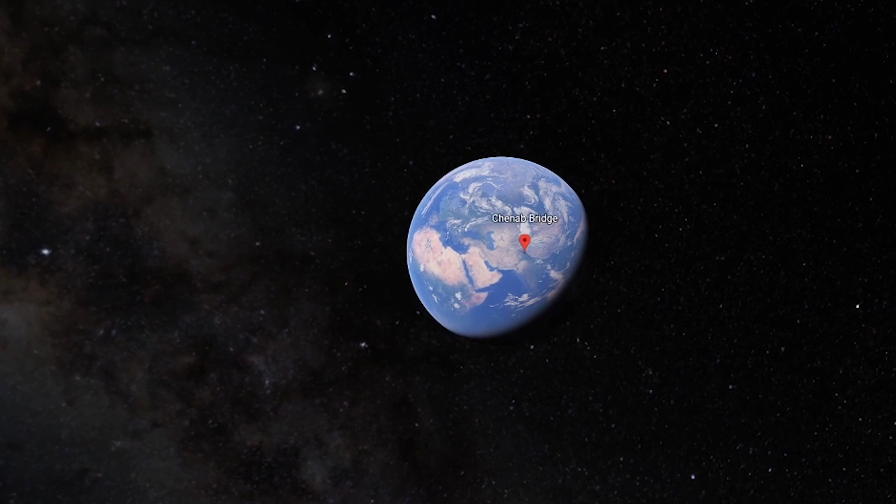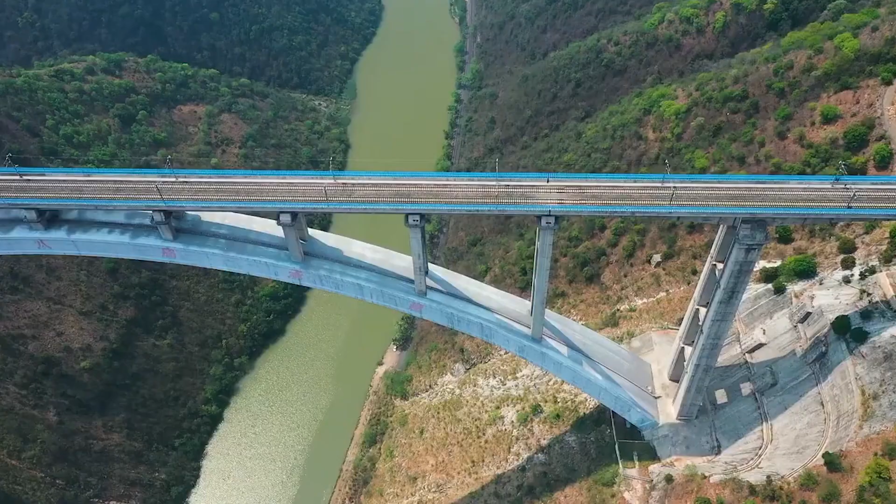Chenab Bridge is located in Jammu and Kashmir region in India. It is a part of the Jammu-Udhampur-Srinagar-Baramulla Rail Link USBRL project. Chenab Bridge has the unique distinction of being the highest railway bridge in the world, spanning at a height of 359 meters above the river. It has been built in some of the toughest conditions and is really a marvel of engineering.

The USBRL project is owned by and being built under the guidance of Northern Railway, Indian Railways. Northern Railway is one of the oldest and biggest railway zones in Indian Railways. The Northern Railway holds its headquarters at New Delhi.

Northern Railway, apart from the USBRL project, has a lot of achievements to its name, like the Jammu-Katra Rail Link project. Northern Railway is also currently under the process of constructing some of the toughest projects in the Himalayan region, including the Rishikesh-Karnaprayag project and the Bilaspur-Manali-Leh project.

The trustworthy team of Konkan Railway Corporation Limited is in charge of execution of the USBRL project. They have ample experience of working in tough terrains, like the Konkan Railway Network commissioned by them, which was an extremely tough project due to the mountainous terrain and more than 2,000 bridges and 90 tunnels. It was the biggest railway project of the century.

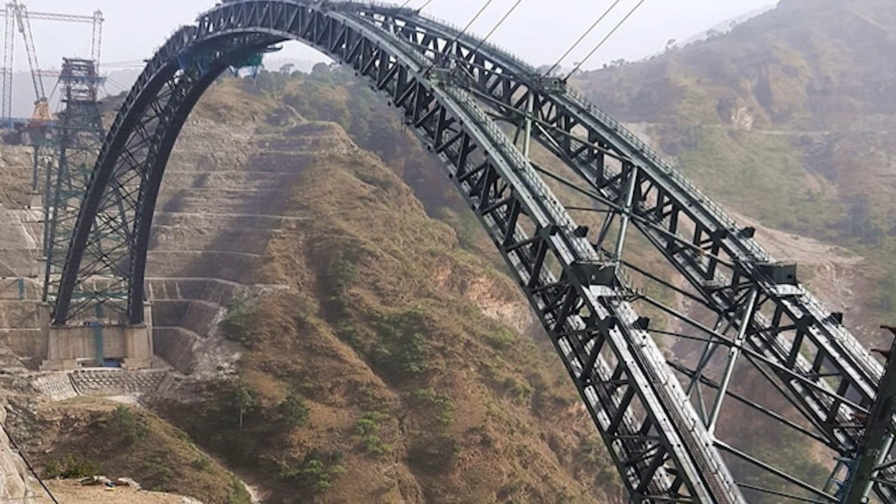The project of construction of Chenab Bridge has been awarded to the Chenab Bridge project undertaking, in which AFCONS is the executing partner. The Chenab Bridge is being constructed by AFCONS Infrastructures Limited. AFCONS is a transnational company with projects in over 25 countries.

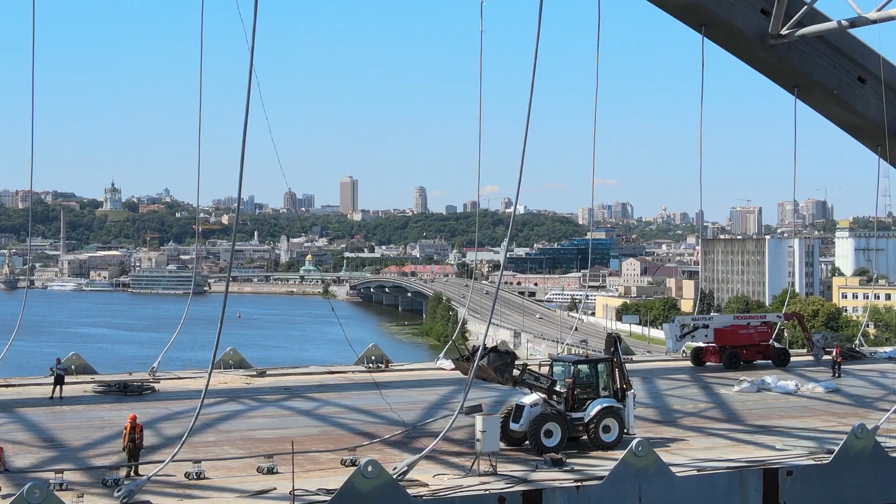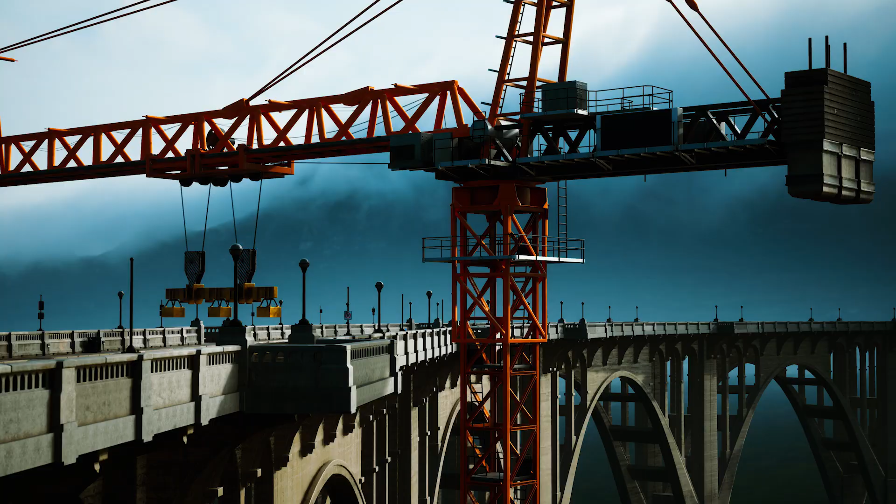It is the only Indian company ranked in the top 25 international contractors in both marine and port facilities and bridge sector. AFCONS is also the highest ranking Indian contractor in top 50 international contractors in transportation sector. AFCONS have a huge experience in extreme engineering and construction, and it shows in the construction of the Chenab Bridge.

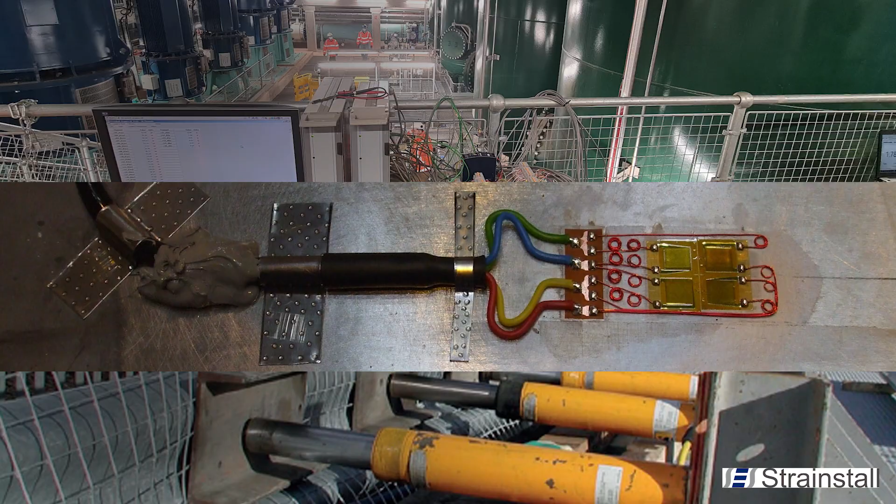The bridge health monitoring part for Chenab Bridge is being handled by Tranz Rail Solutions along with their partner Strainstall, which is a part of the James Fisher Group. Strainstall is the leading structural health monitoring company in the world, with the health monitoring of many signature bridges in the world in their portfolio.

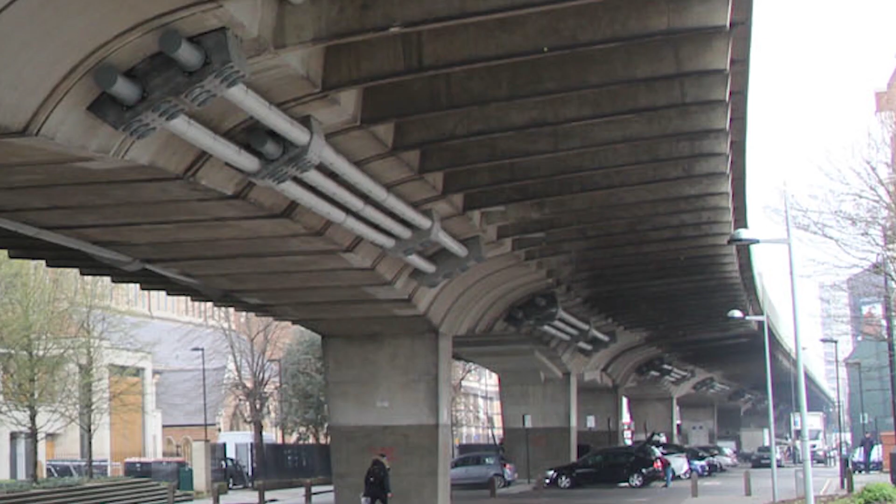The complete solution provided by Strainstall is unparalleled, a combination of hardware and software which makes monitoring of the structure extremely easy, thus resulting in quick decisions and actions. Tranz Rail was formed with only one mission: to bring in new technology to Indian Railways to enhance the safety of our railway structures.

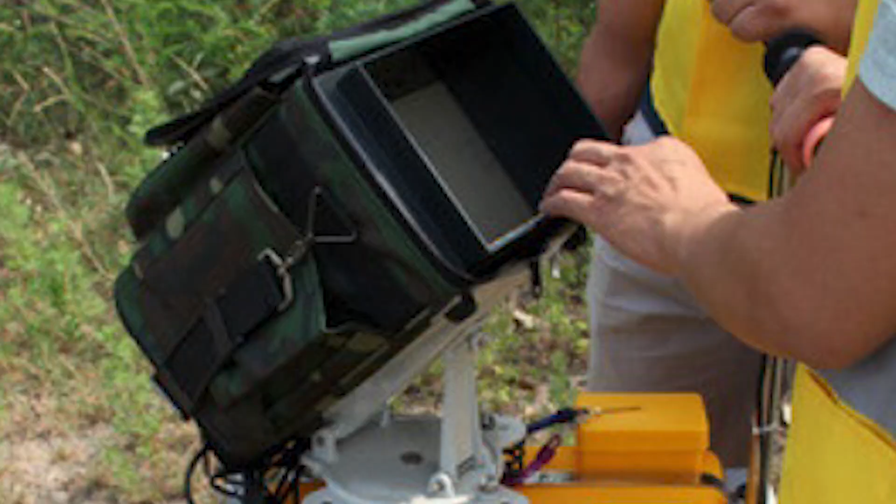Tranz is responsible for introduction of the latest ultrasonic testing technologies in India, like B-scan with 9 channels, ultrasonic vehicular testing, etc. Tranz is also responsible for getting to Indian Railways a much-needed solution for broken rail detection. At Tranz, the motto is, "Change is the only constant," and they strive to always change for the better.

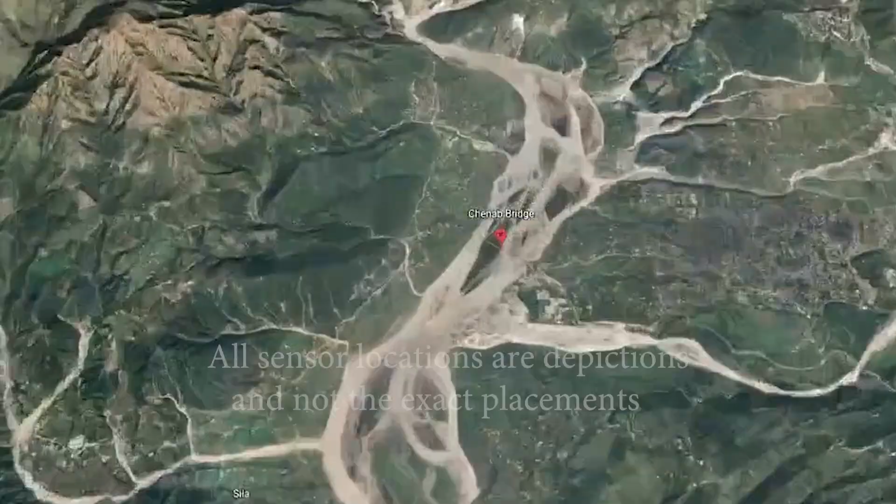Now let us see the components of the bridge health monitoring system at Chenab Bridge. This is the strain gauge. It is one of the most frequently installed and important sensors used in structural monitoring. Strain gauge measures the surface strain, which can be used to determine other responses such as stress, load, and fatigue life consumption.

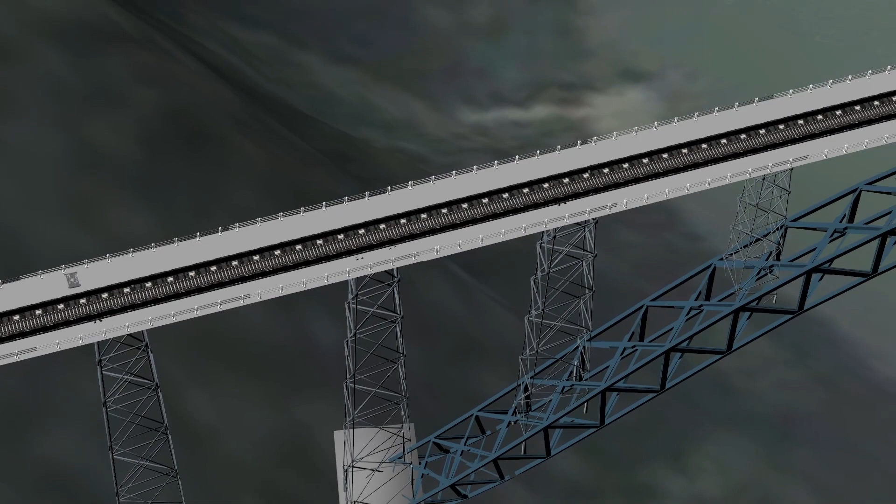It is probably the only sensor with a unitless measurement. Its output is microstrain, which is commonly used as the accepted output. On the Chenab Bridge, strain gauges are installed to the steel surface and critical locations on the bridge.

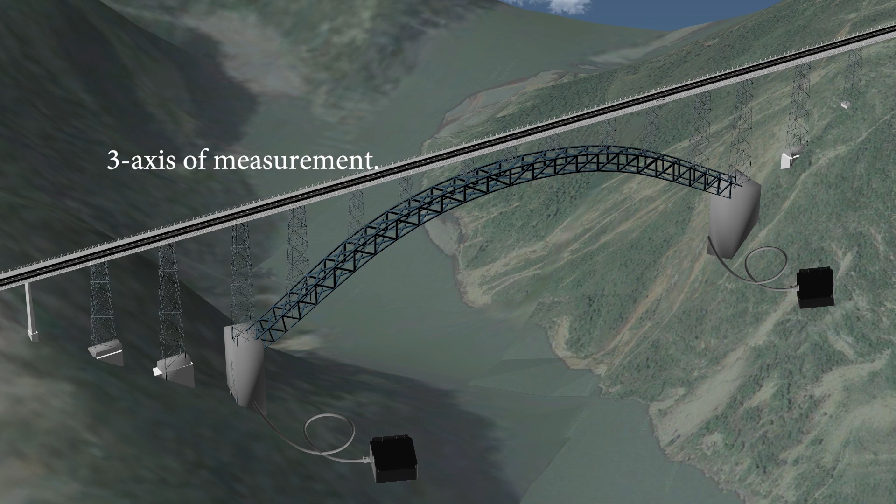This here is the accelerometer. It is a vibration-based sensor which measures the rate at which velocity changes with time in terms of both speed and direction. It often has 3 axes of measurement. As acceleration is particularly important for bridge structures because it is closely linked to the natural and loading frequencies of the structure, it is a very important part.

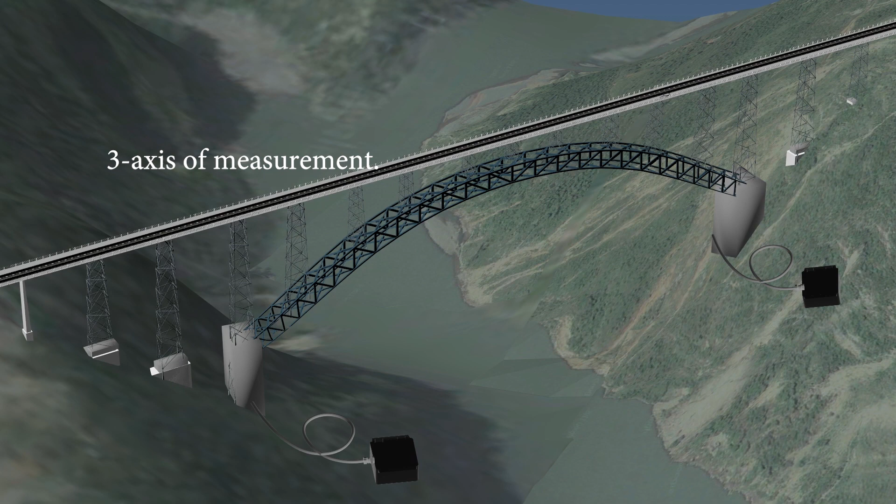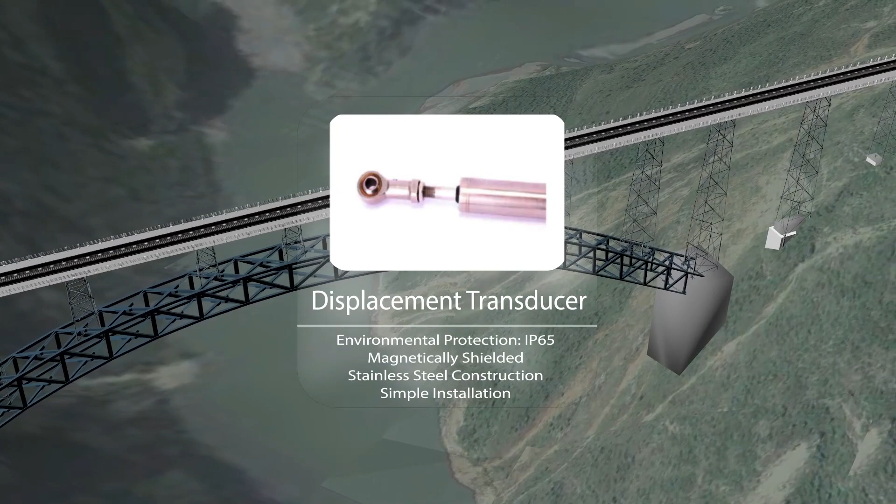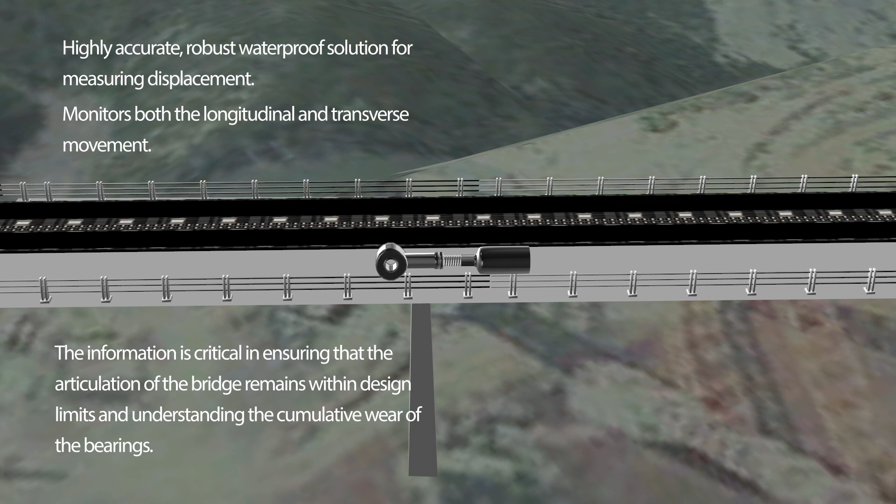This is the displacement transducer. Its main job is to measure the movement between two objects. This is a highly accurate, robust, waterproof solution for measuring displacement. On the Chenab Bridge, it is installed at selected bearings to monitor both the longitudinal and transverse movement. The information it provides is critical in ensuring that the articulation of the bridge remains within design limits and understanding the cumulative wear of the bearings.

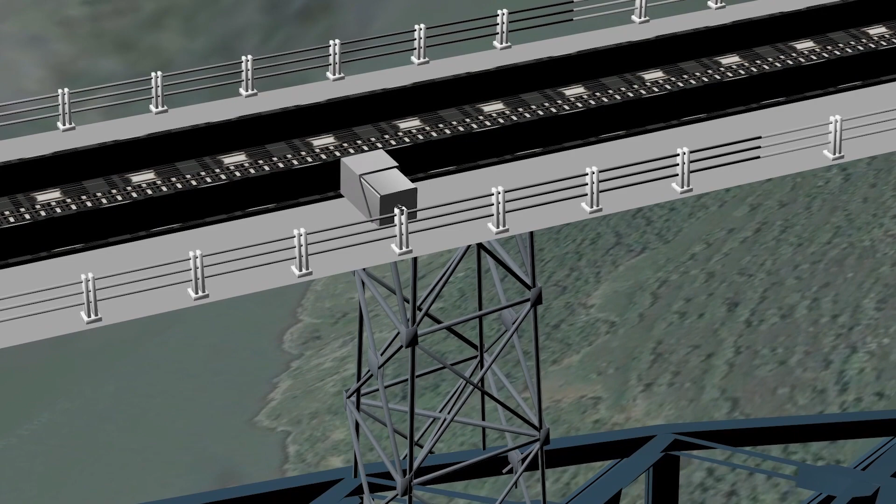Next up is the latest and greatest state-of-the-art GNSS-based deflection monitoring system. It connects to many satellite systems like GPS, GLONASS, Galileo, BDS, QZSS, IRNSS, and SBAS, and thus is very accurate. On such a large span bridge as the Chenab Bridge, the mid-span deflections and lateral movements can become very large and should be monitored continuously to ensure the movements are within service limits.

The system has two parts, rover and reference station. It has the ability to output millimeter accuracy positional data through post-processing technology using its amazing software, and offers a centimeter accuracy through the RTK ability. The rover is located at the mid-span of the bridge, and the reference station is located at the bridge control room, which is a fixed location. The system uses both these in conjunction with all the satellites to provide accurate deflection data.

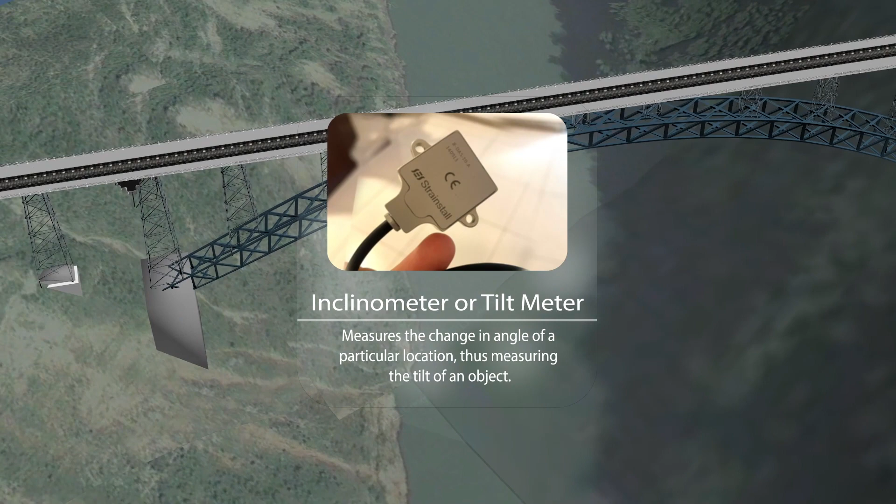This is the inclinometer. It measures the change in angle of a particular location, thus measuring the tilt of an object. It uses a gravity-based technology to accurately report the current angle. Using this information, it continuously monitors the change in angle of the object, thus monitoring the tilt, which is why it is sometimes also known as the tilt meter.

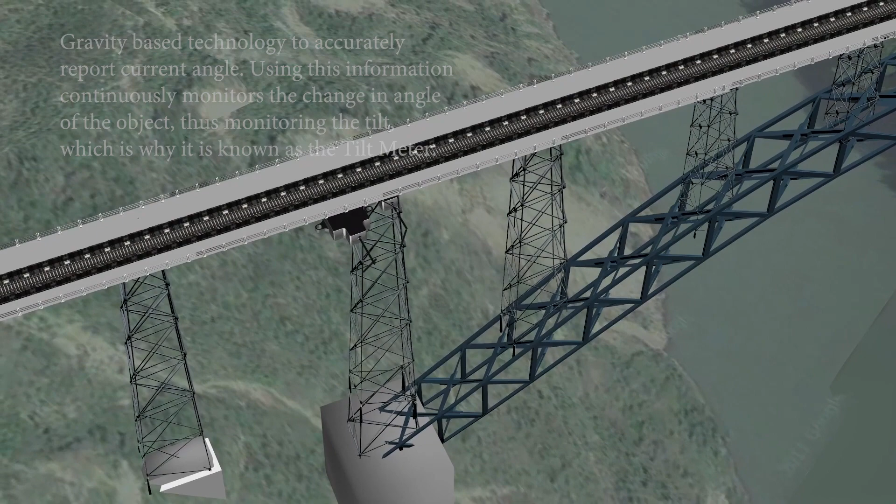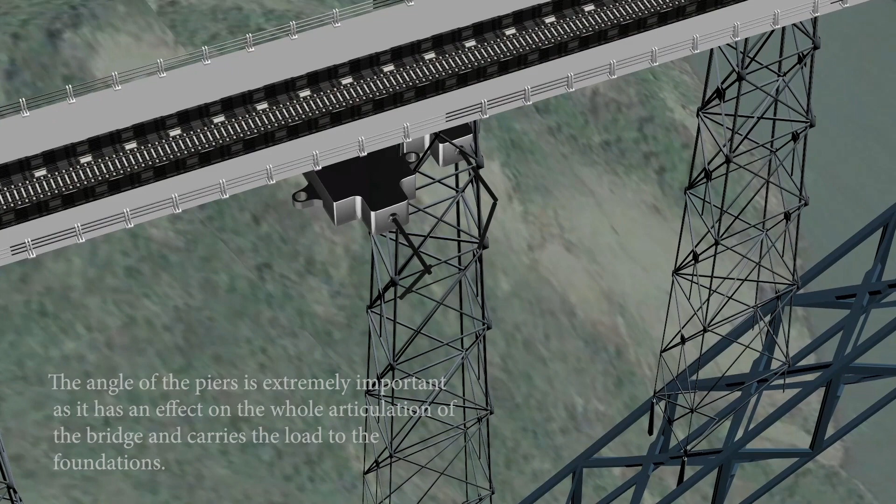On the Chenab Bridge, it is installed at the top of the tallest piers connected to the base of the arch. There it measures the angular change in two directions, giving valuable information on how the piers are moving through train passes and seasonal temperature changes. The angle of the piers is extremely important as it has an effect on the whole articulation of the bridge and carries the load to the foundations. So even though this sensor has a nickname, it is actually pretty important.

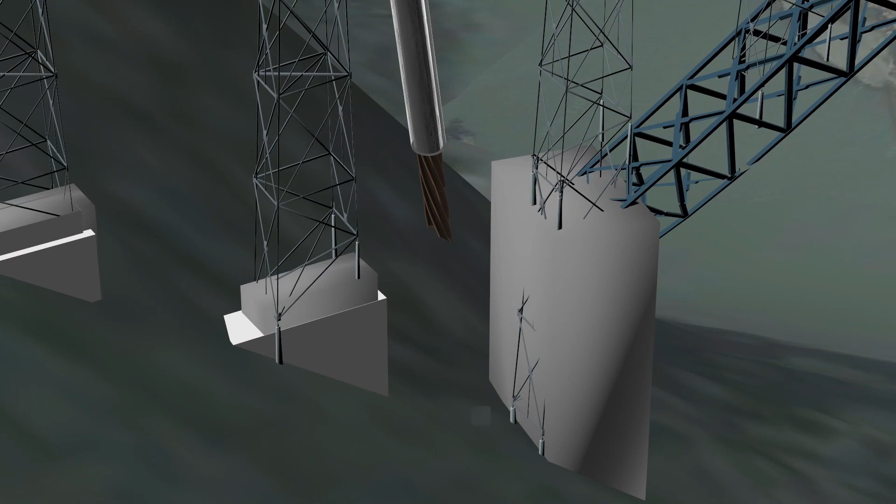The embankments below the Chenab Bridge play a critical role in supporting the structure. Extensive strengthening has taken place on both sides of the valley. Ground anchors are installed at a number of places to stabilize and maintain the strength of the embankment. The responsibility of the next item is to ensure that the ground anchors maintain the strength. This is the ground anchor load cell, and it is used to monitor the load in the ground anchors.

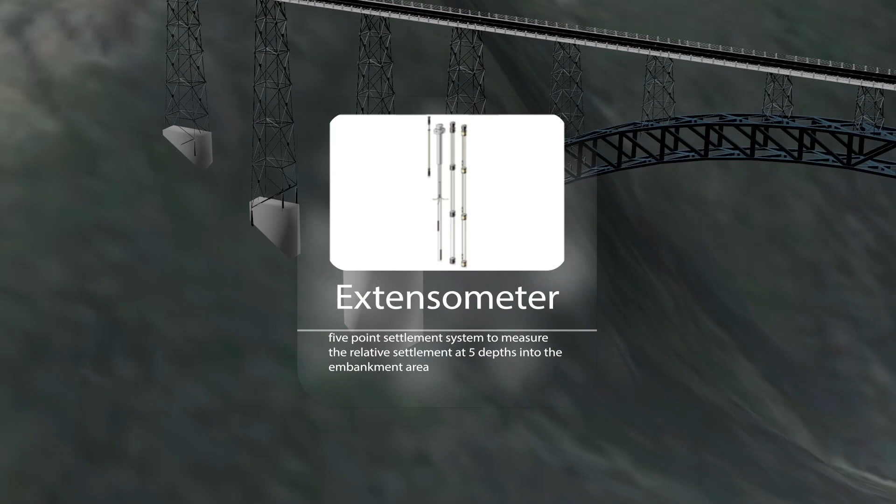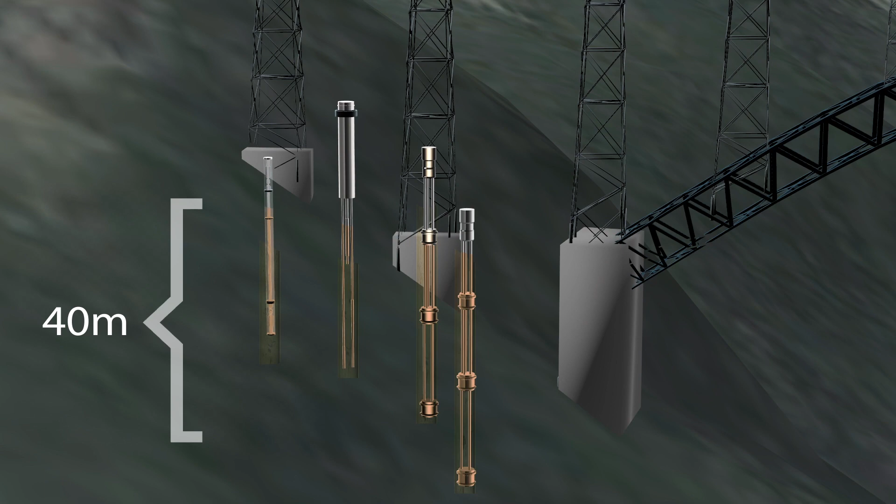To ensure the stability of the embankments and look deeper into the ground, this is your guy, the ground extensometer. In the Chenab Bridge, it is being used as a 5-point settlement system to measure the relative settlement at 5 depths into the embankment area. To put it in place, a borehole is drilled at 40 meters into the embankment with rods grouted at 5 selected depths. These rods lead up to the ground level, where the vertical movement of each rod is monitored using an LVDT-style automated readout system. The real-time monitoring allows for continuous monitoring to ensure the embankment remains stable, and any movement is reported immediately to the trackside team.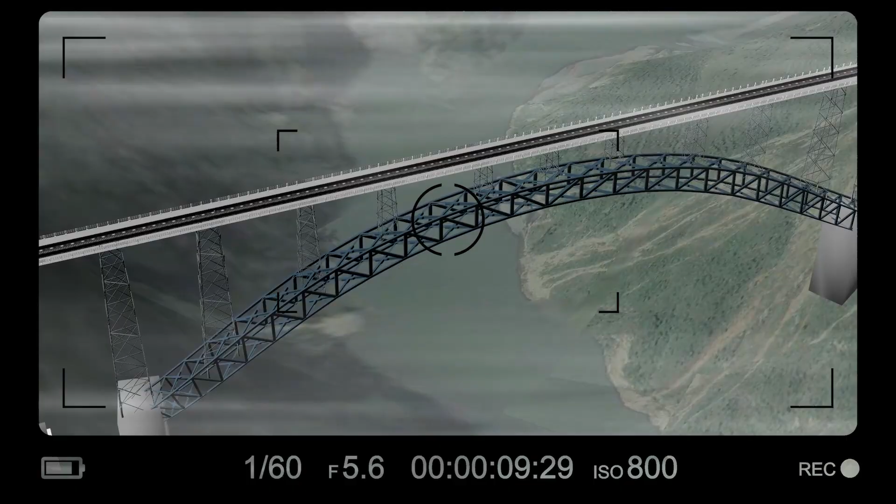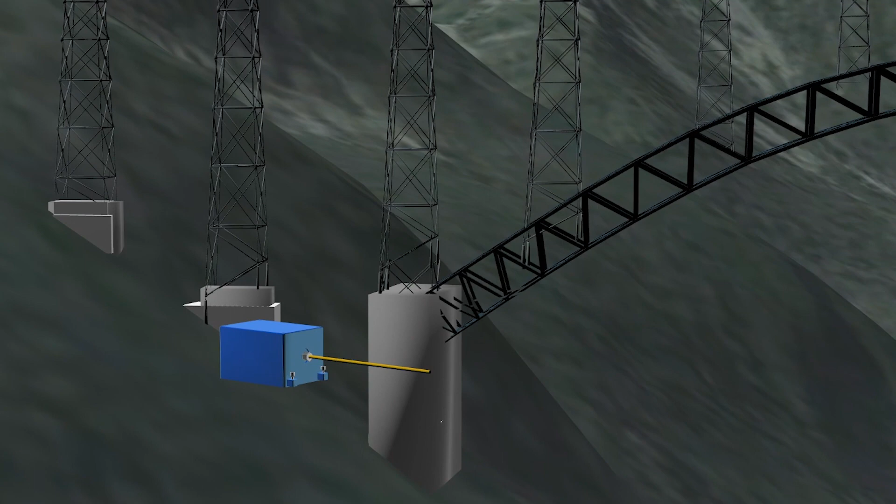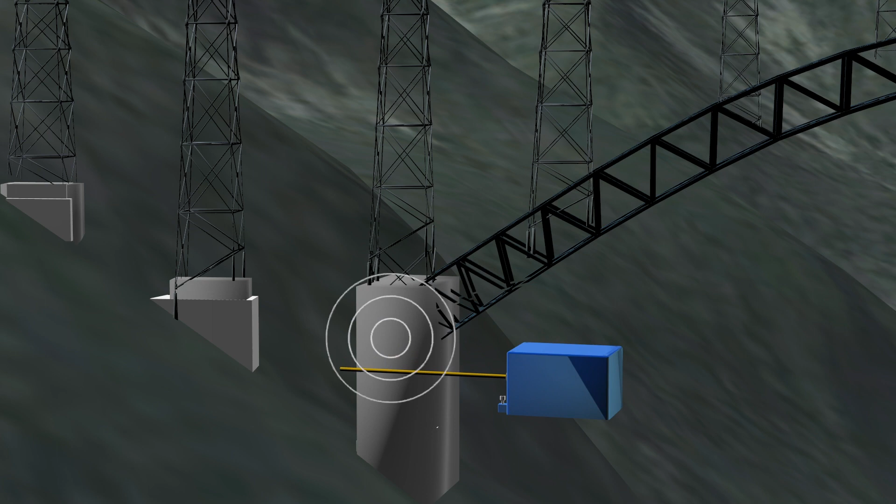Earthquakes are scary, but out of our hands, and nature rules there. However, what we can do is to monitor and collect data at a very fast pace from our structure in case of any tremors, so we can monitor the structural response to the tremors and identify any permanent changes in the structure. This is where this next one comes in, the seismic sensor. In the Chenab Bridge, it is installed at the base of either side of the arch, slightly away from the structure to detect tremors. In addition, it can also send out automated alarms to the structural monitoring team and also share with them the location of the seismic event and its magnitude, linking to a real-time online database of seismic events from USGS.

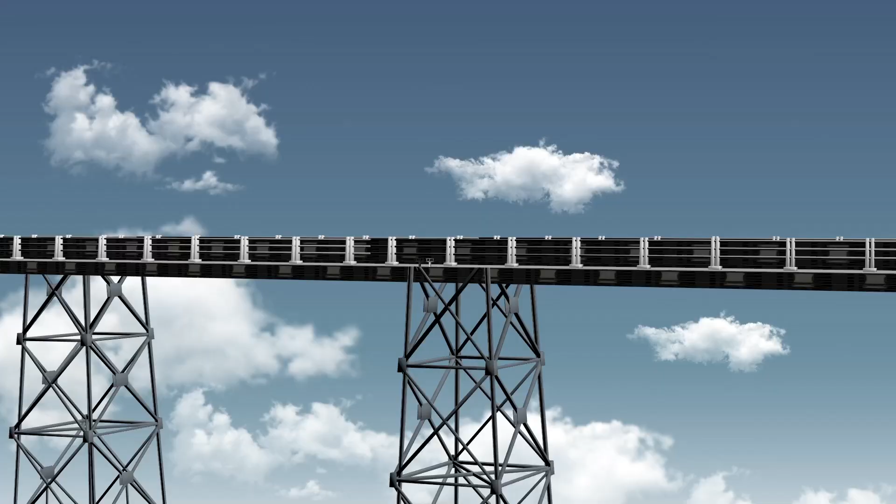Being the tallest railway bridge in the world, the Chenab Bridge shall be exposed to strong gusts of wind sweeping through the valley. These large wind events can cause the bridge to sway and move. These high wind speeds are detected and monitored by the anemometer installed at the midspan. The anemometer uses ultrasonic technology, which means it does not have any moving parts. This is the reason it is relatively maintenance-free.

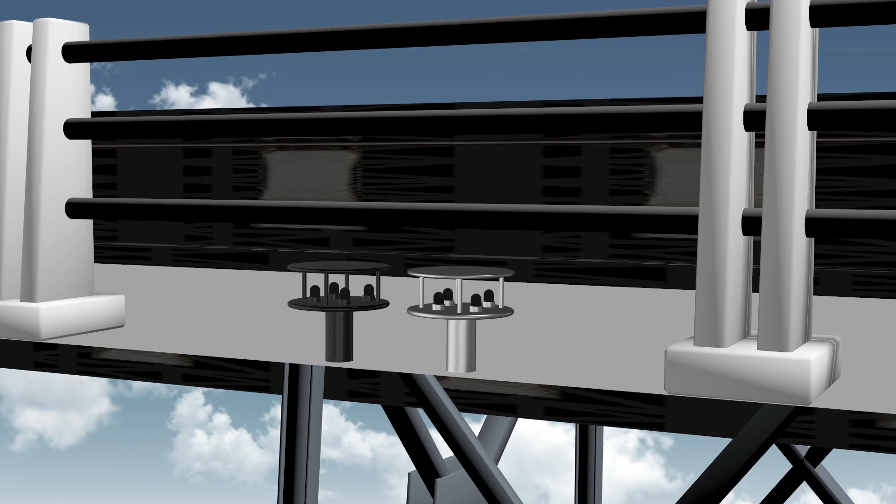In conjunction with the other sensors in BridgeWatch software, it generates dynamic reports of the bridge response during high wind speed events and also alerts the team when the train speed should be brought down or traffic halted until the wind speeds reduce. The Chenab Bridge region experiences large sweeping temperature changes throughout the year.

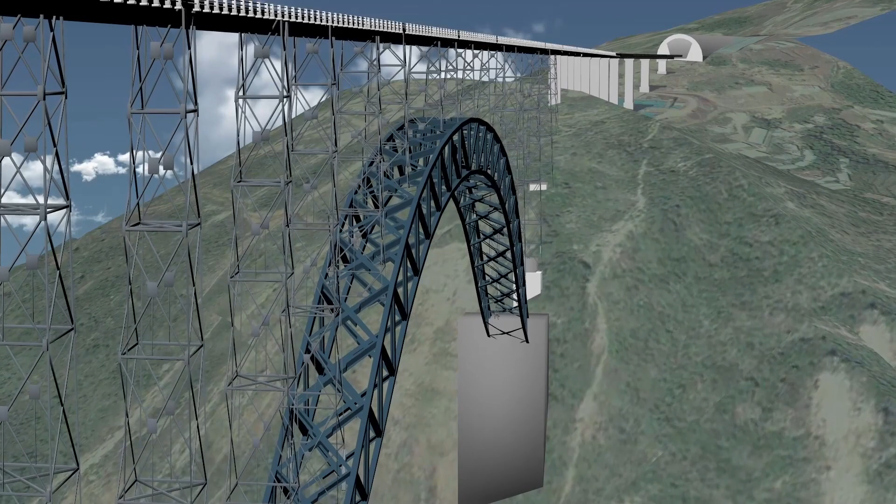This large variance in temperature has a huge impact on such a large mass bridge as Chenab Bridge. The temperature change shall cause the steel structure to expand and contract, changing its position. The changes in temperature are continuously monitored by the temperature sensor in correlation with the data from all other sensors to understand what effect temperature change has on the structure.

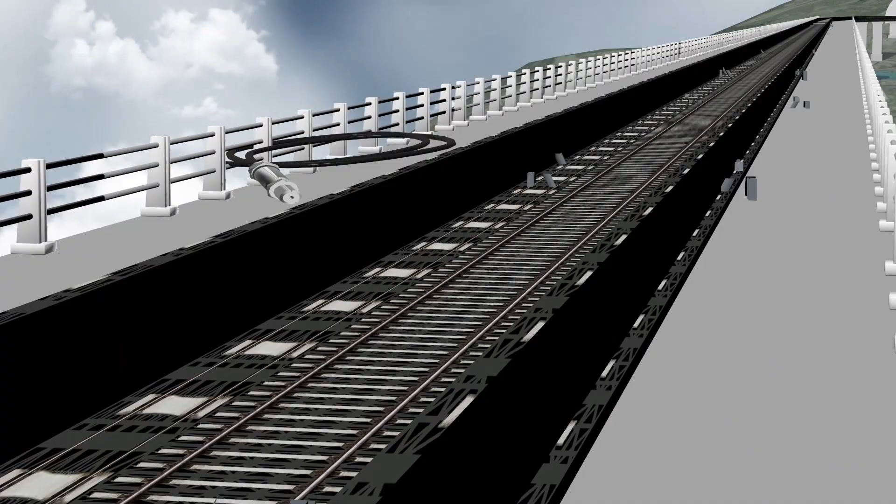Now coming up is the heart of the system, the Data Acquisition Unit, or DAU in short. It is a vital component of the structural monitoring system responsible for the collection of data from the various sensors and converting raw sensor measurements to useful engineering units. Chenab Bridge is so huge that two of these have to work together to collect and make sense of all the data. Together, they can take care of the processing and filtering of data, fast and event mode logging, and data checking, all in real time.

They are connected to the control room both with a fiber optic cable and also a wireless connection. All the data collected is sent to the main server in the control room. Too much data, yet thirsty for information. This is a common issue with monitoring systems. This is where BridgeWatch steps in to convert data into actionable information for the end users.

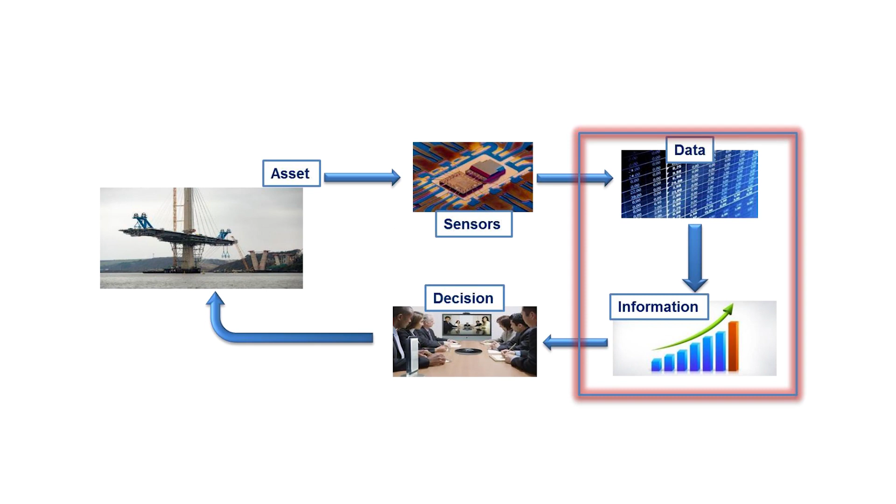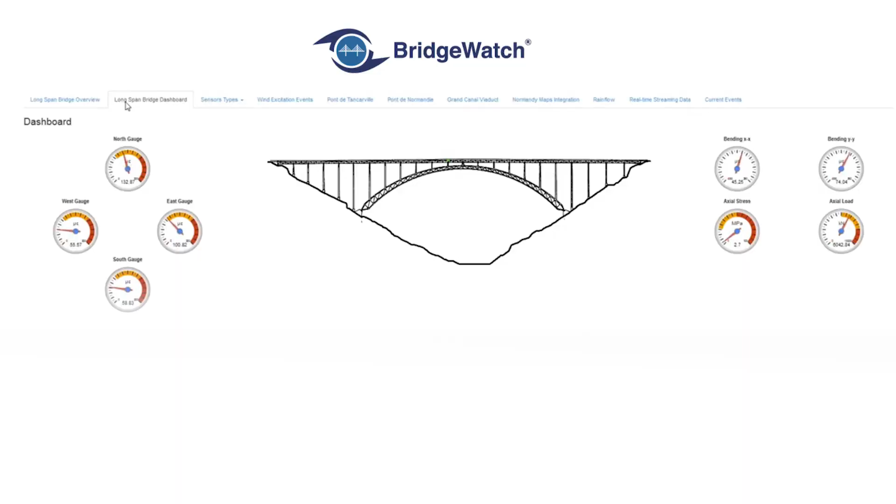BridgeWatch is a super smart structural asset management system. With so much data being collected on the bridge, it is imperative that a powerful user-friendly software like BridgeWatch is used to take that large volume of data and place the useful, valuable information at the operator's fingertips. Deployed on a server in the control room, it provides real-time sensor dashboards to the operators.

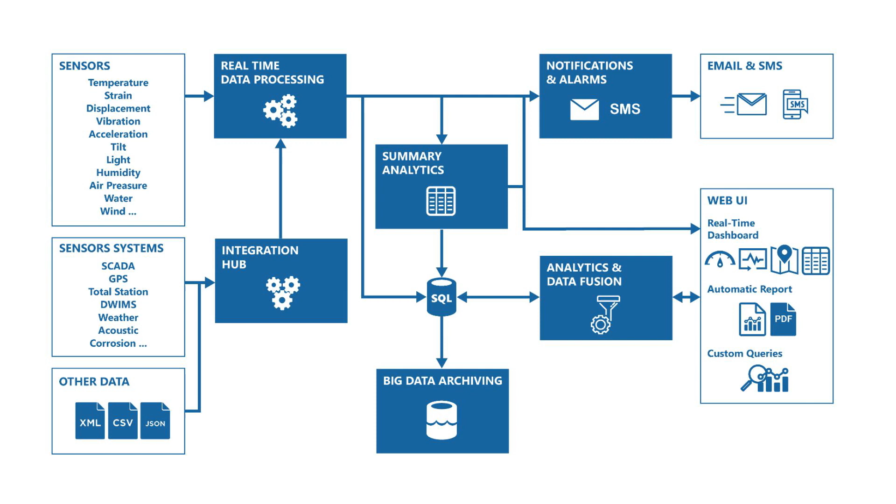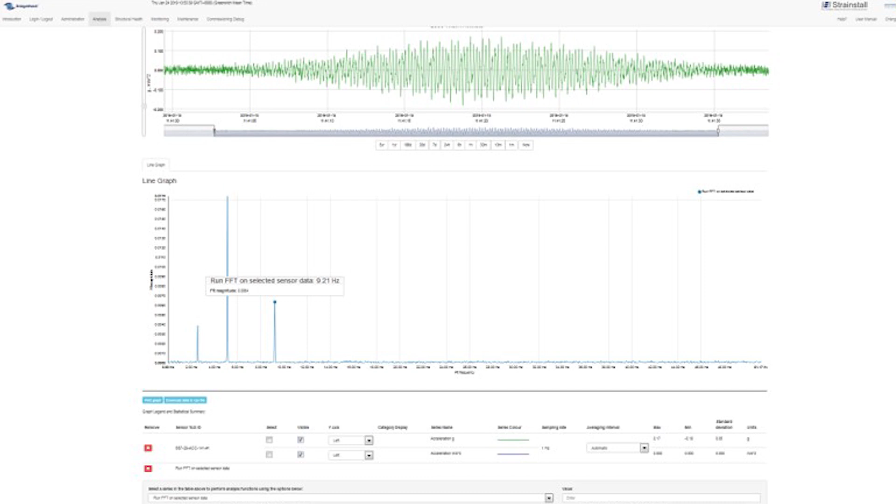Since it is a state-of-the-art software with nothing else really in comparison, it also has the ability to carry out real-time analysis on dynamic responses of the bridge, providing live event reports from passing trains, high wind speeds, and seismic events. With the automated FFT functionality and integration with RTK GNSS positions, the operators of the bridge are able to easily identify mode shapes and maximum deflections through the various events.

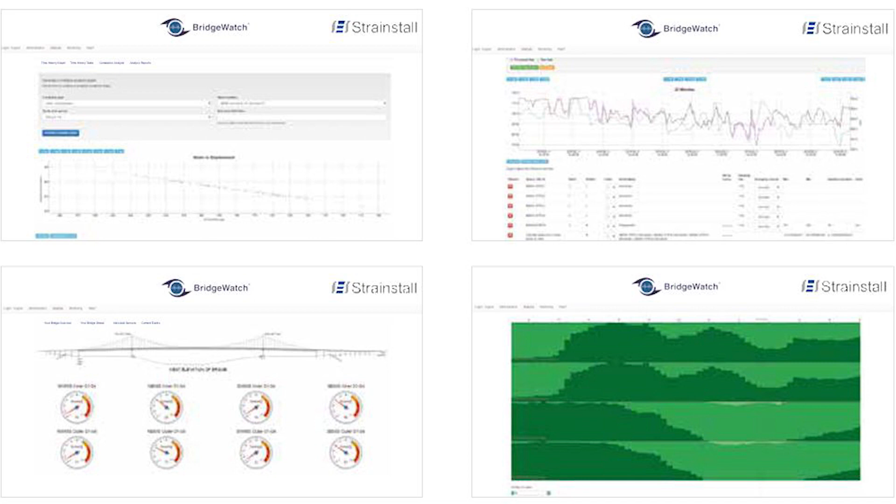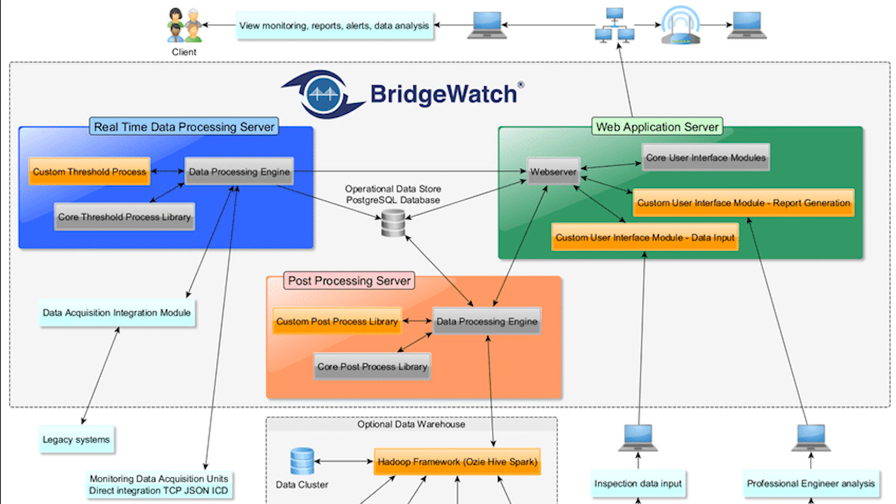In addition to the real-time and advanced reporting functionality, BridgeWatch also ensures that all data is at the engineer's fingertips with actionable information and many tools for custom analysis. It is also fully customizable and can be programmed with any of the custom calculations which the engineers want from the data, thus saving a huge amount of time for the engineers managing the bridge.

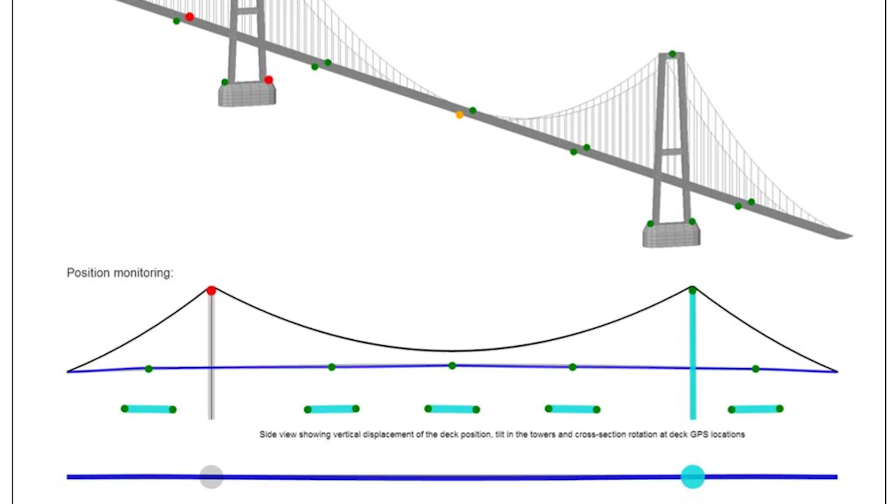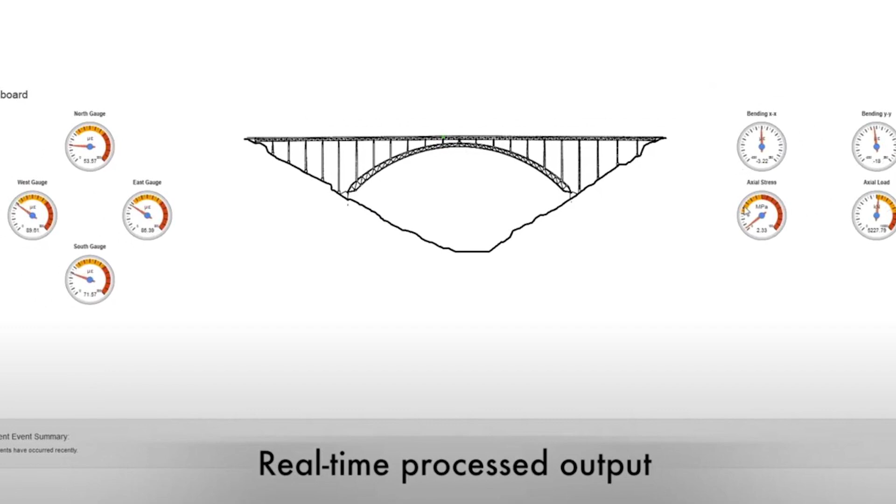It can also send out any number of alerts based on the data from any of the sensors or a group of sensors, fully controlled by the engineers and easy to set up. BridgeWatch is the interface between the hardware and the engineers, and it is really good at what it does. On top of it all, BridgeWatch can be used on any laptop, tablet, or smartphone from anywhere in the world. If the data acquisition unit is the heart of the system, then BridgeWatch is definitely the brain of the system.

So this is how the Chenab Bridge is being continuously monitored by a variety of sensors and the software BridgeWatch. All of them work tirelessly 24/7, 365 days in a year to ensure the safety of the bridge and the people using the bridge. Thank you.